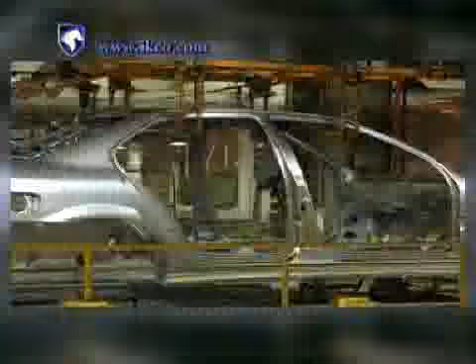Iran Khodro Industrial Group, the world's 15th biggest automotive company, holding more than 60% of the local market, surpassed a production volume of 520,000 passenger cars per year in 2004. Since then, Iran Khodro Company, IKCO, has planned to reach an annual production volume of 1 million vehicles per year till 2010.

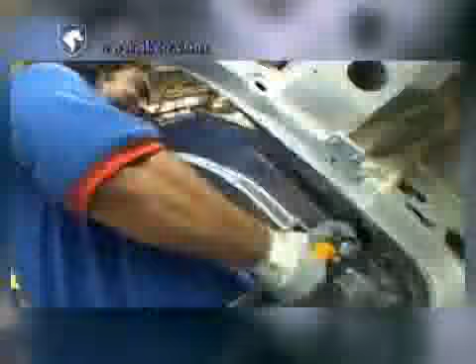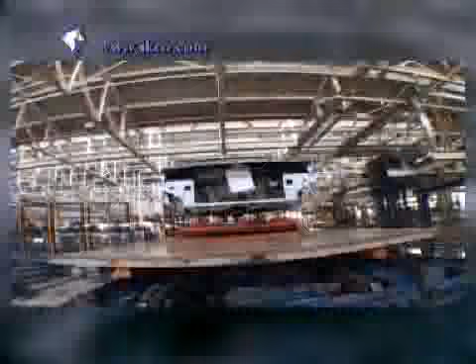After the Islamic Revolution, Iran Khodro outlined new production strategies in 1990, which set out the 7-year plan in 1995, and the company's activities entered a new phase.

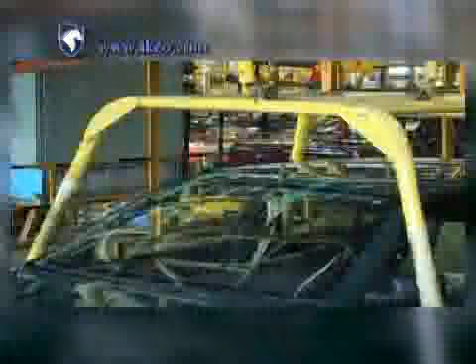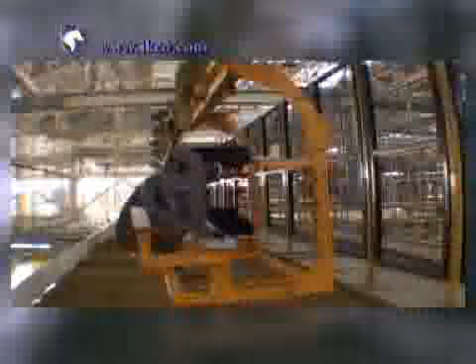Iran Khodro Foundry plant consists of 2 separate aluminum and cast iron foundry halls, producing engine cast iron parts, cylinders, cylinder heads, manifolds, flywheels, and gears at the beginning of its operation. Other parts are produced outside the company.

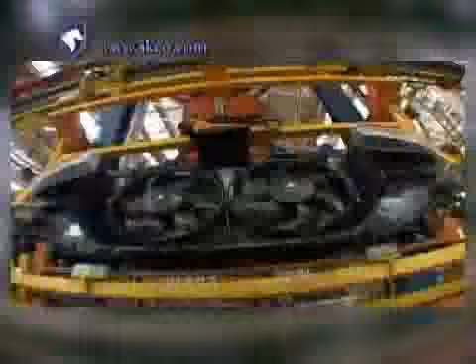The assembly shops operate in 3 phases. Total assembling capacity in the 3 shops is 125 units per hour. In the near future, after the launching of the new assembly shop, the assembly capacity would increase by 45 units per hour, which is about 30%.

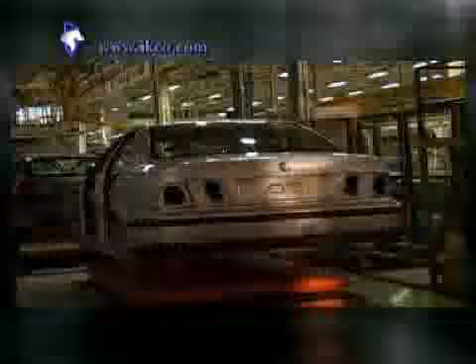Activities such as robotic automation technology, setting up and expanding internet and intranet networks, optical fiber network, obtaining new product design and development capabilities, establishing total quality management, integrating human force qualities and quantities, developing and improving production shops, and extending international cooperation aiming at expanding international production capabilities are some of the industrial group's activities.

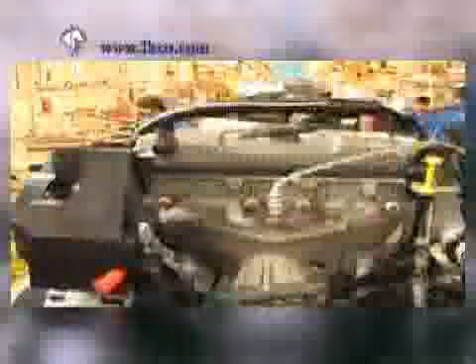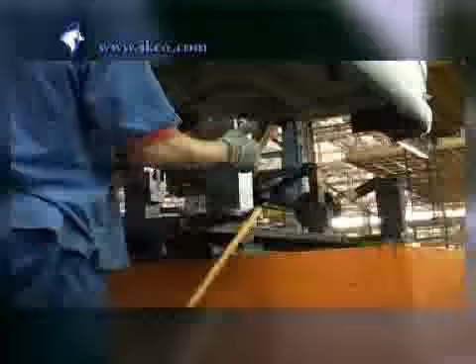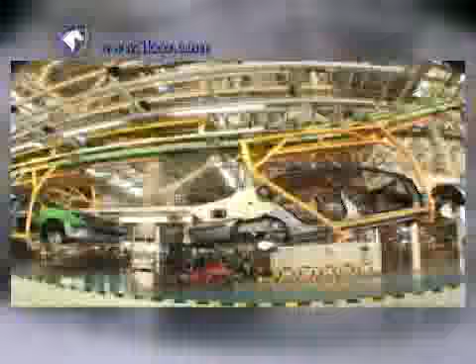Purchasing and transferring technologies for development and production of new products, designing and establishing new press shops, setting up new body shops, renovating paint shops, powertrain aluminum foundry lines, renovating and restoring engine plants, and developing molding technology are some of the most important projects accomplished in the 7-year plan.

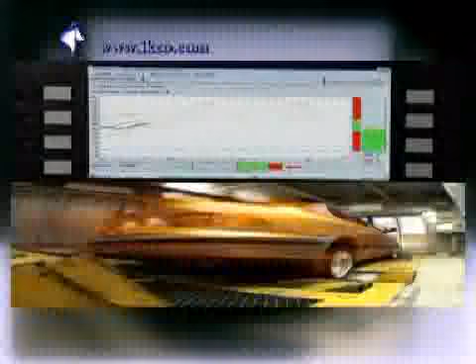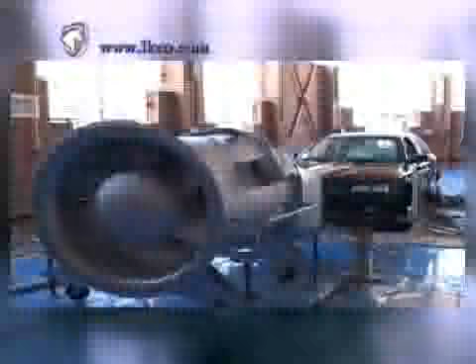Production, engineering, equipment maintenance, and related procedures planning are performed within IKCO, mainly consisting of press, foundry, engine, body, paint, and assembly groups. The Cut and Press Shop is at present the biggest press facility in Iran, turning into one of the world's biggest and most modern shops.

After the establishment of the new press shop, the production capacity is doubled. It's noteworthy that in the new system, with its 6 sets of molds and replacing equipment, replacing the whole production line would not take more than 200 minutes.

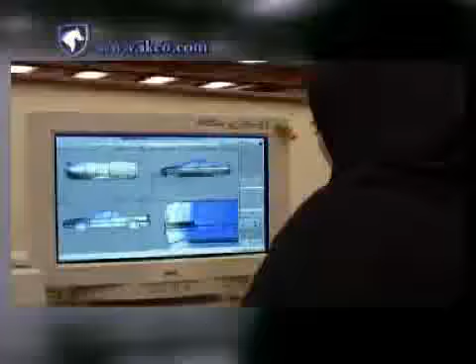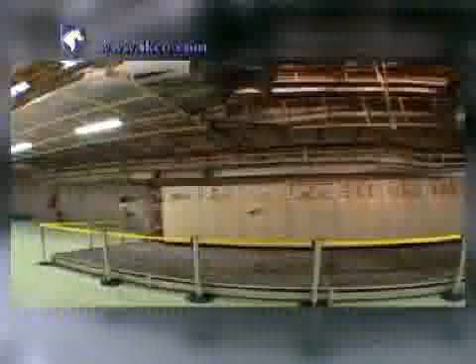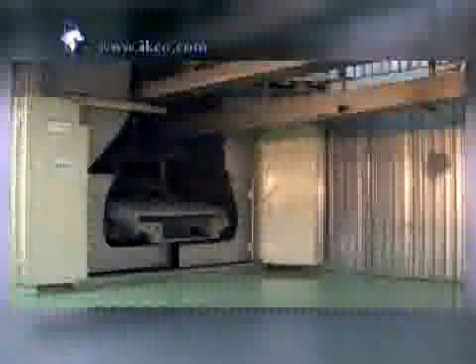Iran Khodro operates 4 big, modern paint shops, which are among the most sophisticated shops in Iran and the Middle East. Painting 45 bodies in an hour by spraying paint using automated robotic technology and a totally automated conveyor system in paint shops number 2 and 4 have been the reasons for the high-quality painting process.

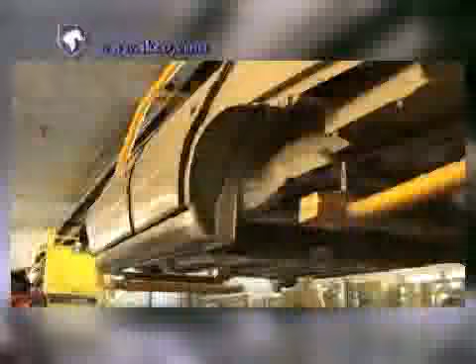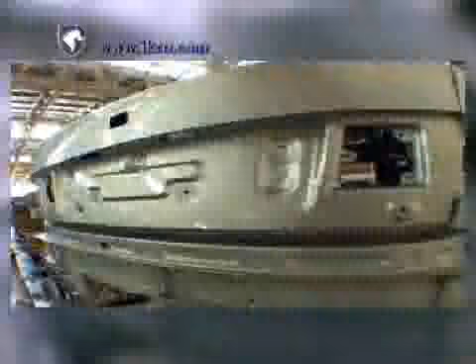Another main reason for progress in IKCO has been the new product development center. Employing the latest automotive technologies as well as local experts and modern equipment, the center has been able to complete its projects, especially development and production of Samand, quite perfectly.

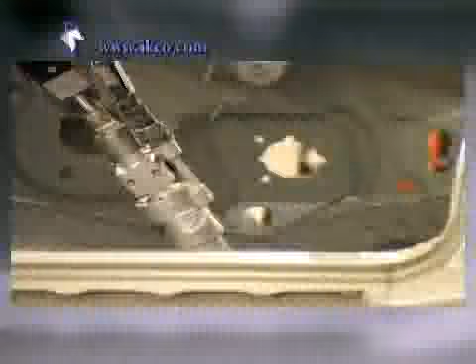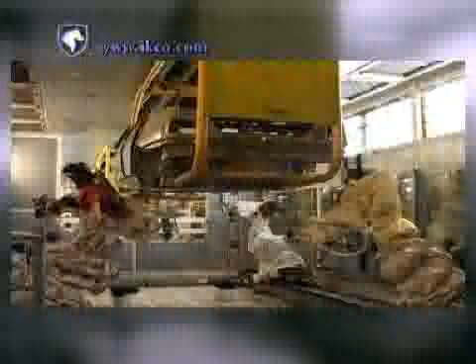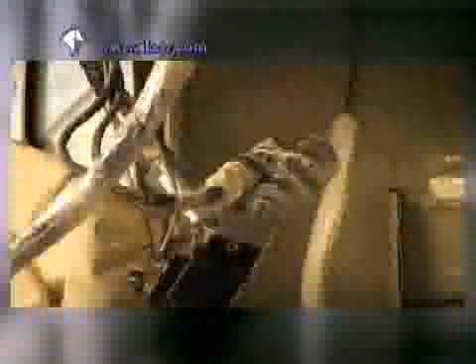Iran Khodro Powertrain plant is the largest producer of petrol engines, which consists of engine, transmission, and axle factories as well as measuring laboratories. This factory is the first in its type, meeting ISO 9002 requirements in 1997 from British BSI. The factory engine got the same certificate 3 years later from German RWTUV.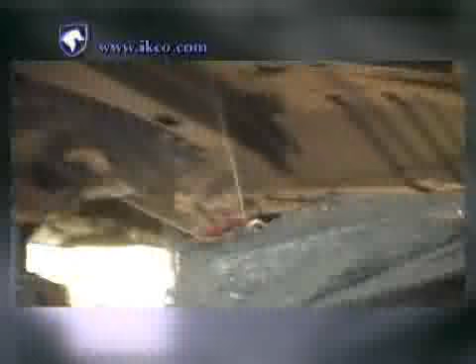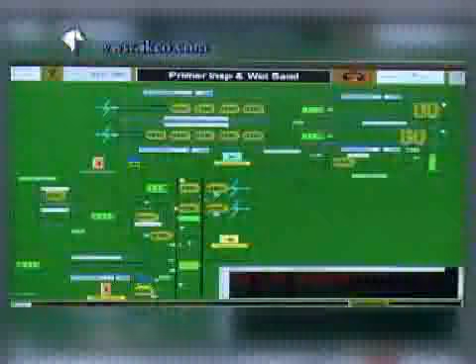Engine plant number 2 has been erected to manufacture engines for Peugeot and other new products in IKCO. In its first year of operation, the plant was capable of producing 60,000 cylinders and cylinder heads. Meanwhile, the establishment of new production lines will increase the production capacity to 500,000 units annually.

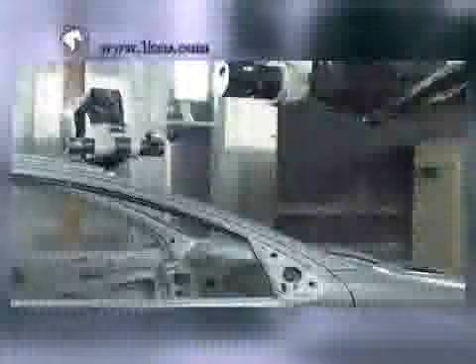Iran Khodro has been able to export its parts and products valued at $115 million in 2004, which is estimated to be increased to $200 million by the end of 2006.

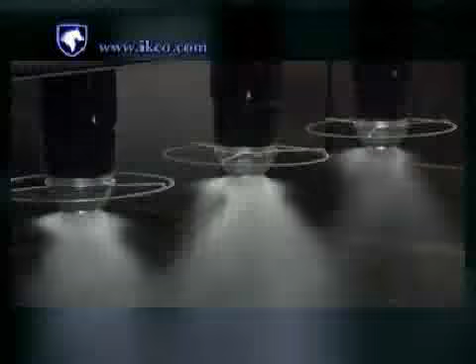Establishment of Samand production plants in Belarus, Azerbaijan, and Syria, as well as agreements on establishment of the same plants in China, Venezuela, and Senegal are among the company's other activities.